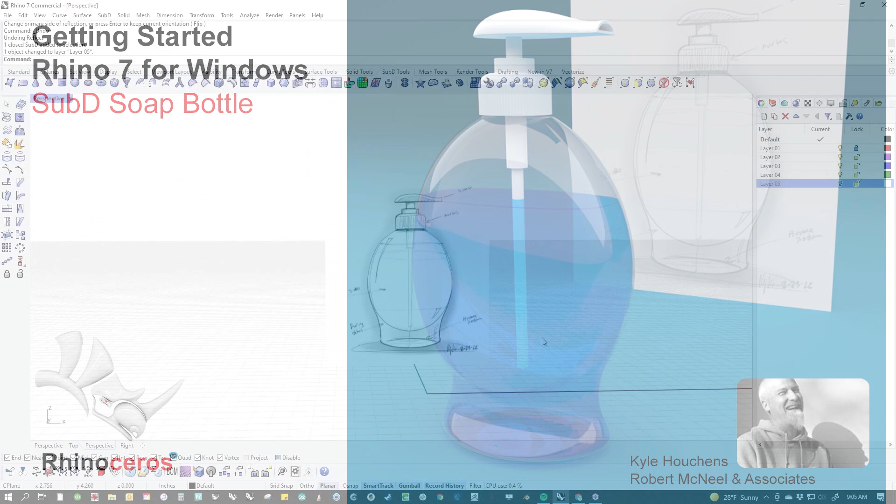This is Getting Started Rhino for Windows. And today I want to talk about a deceivingly simple object that we're going to throw a little wrinkle into. And the wrinkle of this project is this fairly innocuous, fairly simple looking shape, but it's got a fading detail on it down here. So it's got this little detail that starts down here and fades into the rest of

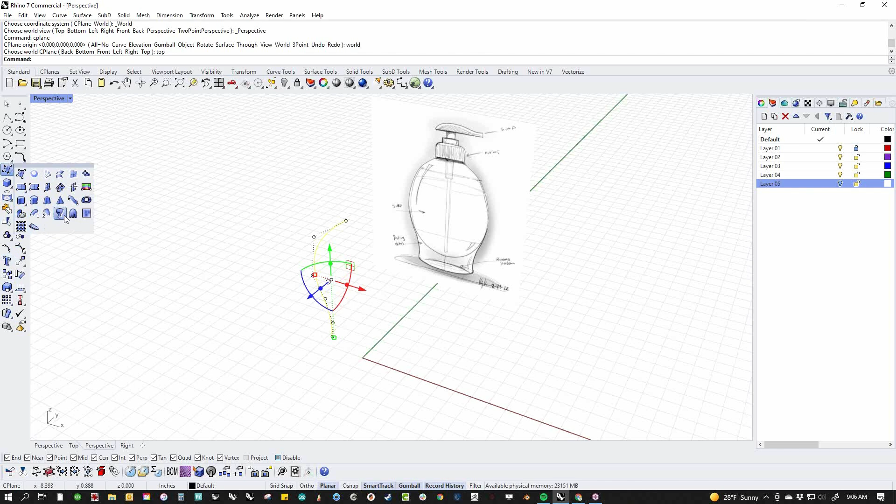this organic shape. And typically speaking, if we were going to do this with NURBS, we would just do a very simple, and in fact, this is actually one of the level 1 or level 2 projects where we would just take this shape, and I'm just going to do this super quick, and we would revolve it, which seems very simple, right? And we would full circle this, and then we'd squish it.

And then in order to get the detail on it, we would actually just take a plane and run it through here. And the way that we would do that is we just drag this and hold down shift and we get a plane. And that makes this detail, right? And if I cap this, and if I mirror this, oh well, mirror this.

My fingers aren't warmed up yet, sorry.

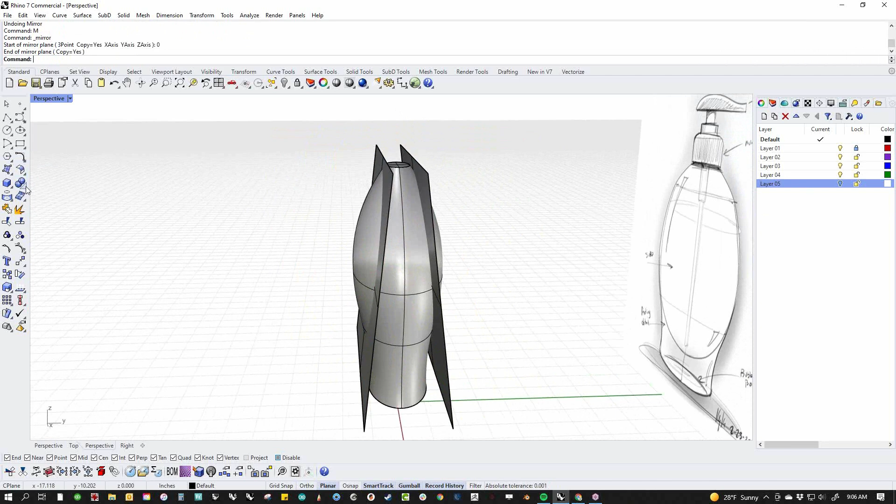There we go. And then if we just do a Boolean split, we get that, right? Now, that's all fine, but that's kind of not what we want. We want this shape to be kind of bulbous, and we want this all to be smooth, and we want this all to have a little detail on it.

And so the challenge here is you could try to figure out how to model your way around that in NURBS, and we could build a surface that's got some crown, and then we could build a transition in here, and we could have some kind of crazy blend that starts out really big and gets really tiny down here and all that kind of stuff. And that is a completely and 100% valid exercise, and that's a completely valid way to do it.

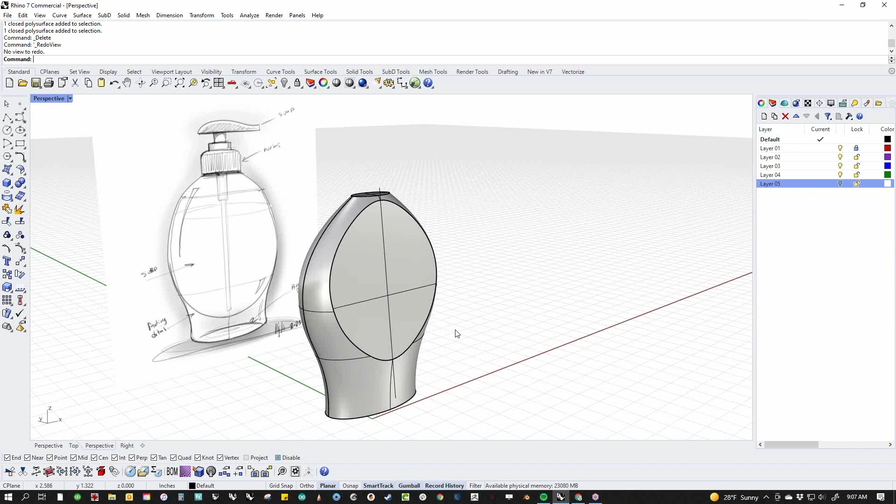However, because in version 7 we have SubD available to ourselves, just hit the chat and let me know how many folks have had a chance to play with SubD yet? If you haven't, you're going to now.

So what we're going to do is we're actually going to model this thing in a couple of different pieces, and we're going to use the best tool, SubD subdivision surfaces. Yes, it's this palette right up here, the SubD tools. So if you haven't had a chance to play with this yet, you're either going to love this or hate this, because this is where we're going for a little while.

And so I did this awful sketch earlier today just to get an idea down, to try and figure out what we were going to talk about today. And I was looking at a couple of different shapes, and I looked at this and I thought, well, this is kind of a standard level 2 NURBS exercise. And then I thought, well, actually, if we throw this detail in here, this turns it from a fairly simple project into a very complex modeling problem. And the nice thing about SubD is it takes those complex modeling problems and it makes them actually fairly simple.

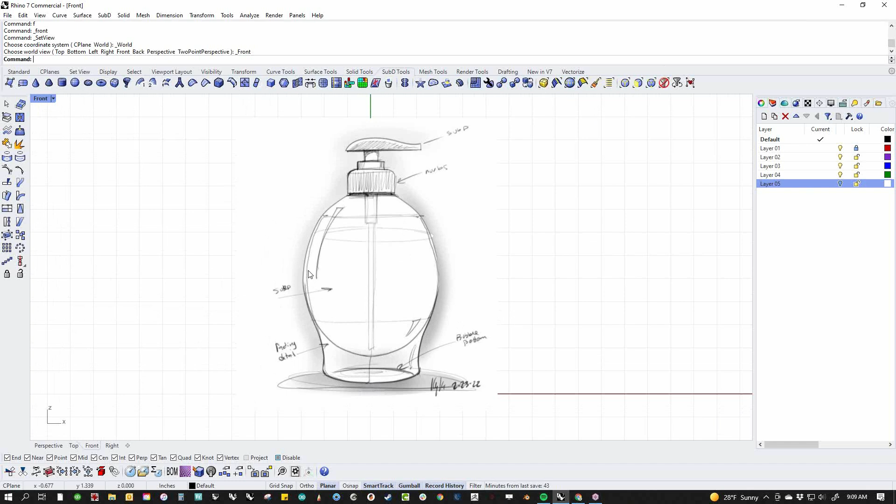And so I started this project the same way I always do, a 2-second sketch, which is one of the reasons I like Rhino, because I don't have to sketch quite as much as I used to. I can just throw something together, have a communication with myself, decide what it is I'm going to do, throw it into Rhino using the picture command.

And if you are not familiar with the picture command, let's go back and run that. We just do the picture command, find our drawing, and we drag it into the space. We can move it around, scale it, rotate it, do whatever we want.

And I'm going to go here to the materials palette. If you don't have the materials palette or the materials tab here, right click, find materials in this list and make sure that it's checked, and that will give you this materials palette. If you click on this, you'll see that this material's loaded up already, which is the soap bottle JPEG.

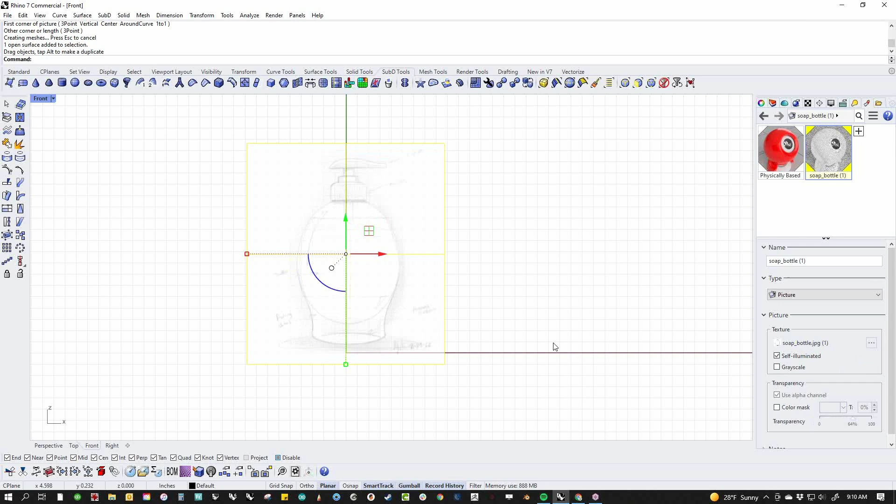And we're just going to crank the transparency up a little bit just so it fades and it's a little easier to work over. And then we're going to stick it on a layer. I'm going to change the layer here, go to perspective view, and I'm going to drag it out of the modeling window back here like this.

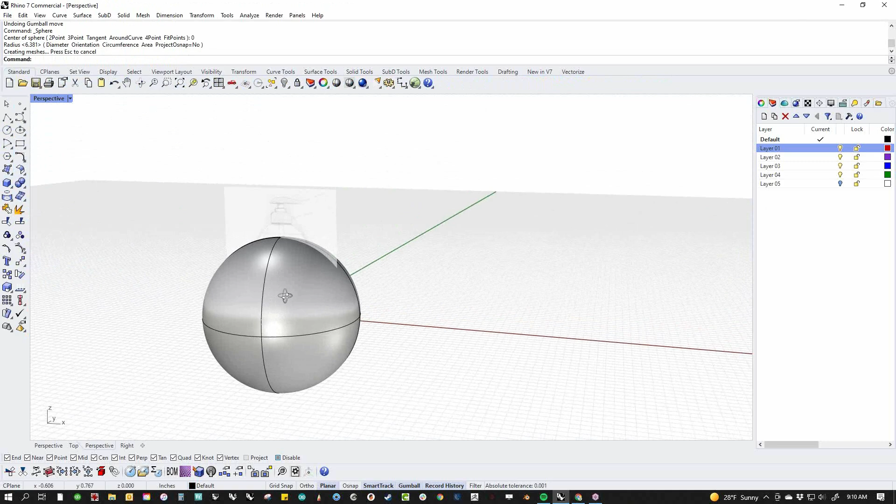And the reason that I do that is, everybody asks me, why do you do that? The reason I do that is because if you're modeling, especially in shaded view, this is what you get. So you can't see the image at all. So I take this and I just drag it back in space, which allows me to still see what I'm doing, but in the front view, the image is still placed where I want it. I'm going to drop this just on the origin just for the sake of it, have it vaguely centered and all that kind of stuff, and we'll use that to work on.

And then I'm going to lock this layer. Now I can work over it, and because it's faded, when I draw curves, I can see what they're doing and all that kind of stuff. So how do we approach any shape in SubD? And for me, the simplest, easiest way to approach SubD is to do what I call the paper doll workflow.

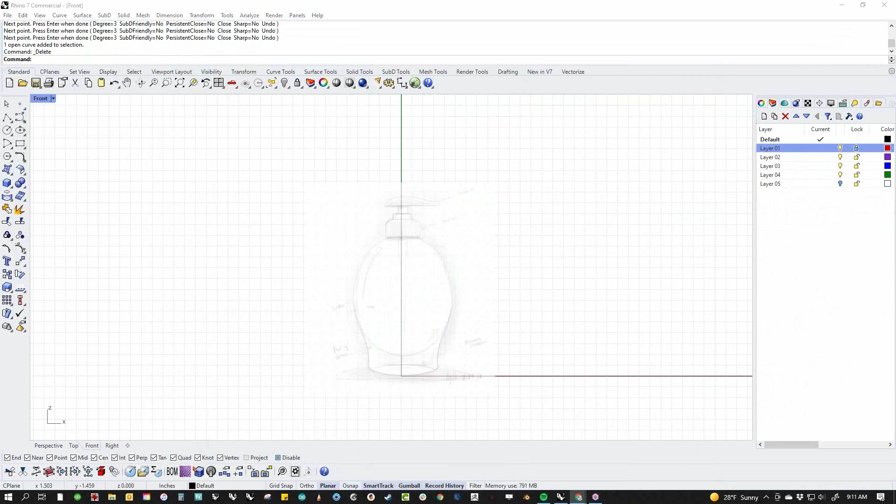But in this particular case, what we're going to do is look at this, and I'm going to grab my little marker thing here, and we're going to look at this and say, how does this break up? Now, the important thing to look at is this shape right here. This is what's going to drive the entire creation of this object, is this oval shape.

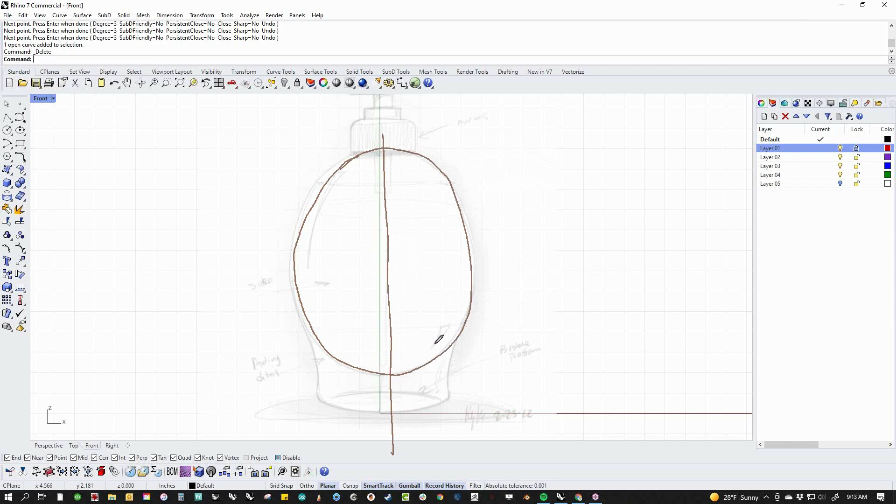And so we've obviously got a center line, and we need 3 points to make a corner, right? So we need at least 3 edges here. So we've got a point here, a point here, a point here, a point here. So we got 4. But that gives us enough stuff that we can go 1, 2, 3 here, 1, 2, 3 here, and we get our 2 separate shapes.

Looks good now? Okay, fantastic. Thank you for letting me know.

So this is essentially the first paper doll that we're going to create. And let me clear this. And so we will go ahead and start drawing. If we go to the SubD menu, we're going to just start drawing a square, right? We're just going to go 1, 2, 3, 4, and we're going to just hit enter to accept it.

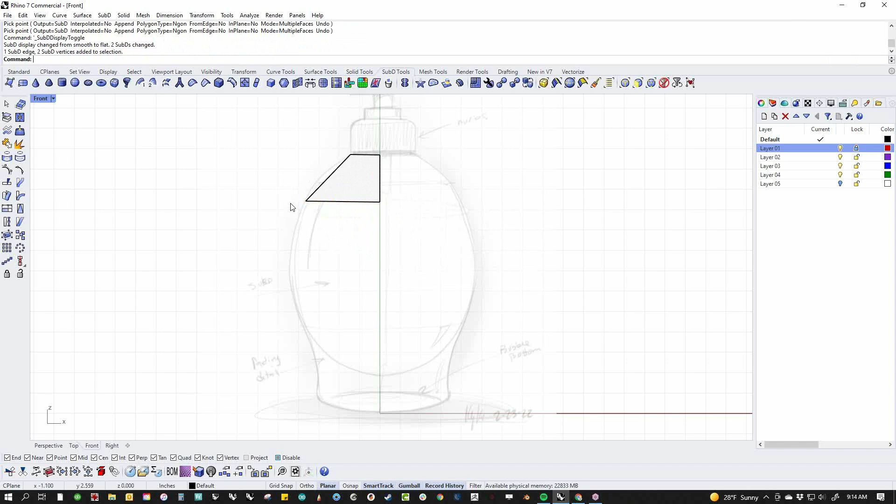And then I'm going to switch to box mode, which is under the tab key. So I'm going to hit the tab key, and that's going to give me my first square. Now, my second square, I'm just going to grab this edge. I'm going to shift control drag that edge, and it's going to light it up. And I'm just going to drag down to about here. I'm going to do the same thing again, and I'm going to drag down to here.

I'm going to shift control drag a point, and I'm just going to pull this, I don't know, somewhere in there. And I'm going to pull this somewhere in here. Now, this gives us kind of a stop sign shape, which we don't want. So I'm going to shift control drag this point. I'm going to shift control drag this point. I'm just going to delete them. Look what happens. Those turn into triangles. And that is going to allow us to do some things in here.

And I'm just going to line these points up. We'll try to keep everything kind of nice and orderly with SubD. And if I hit the tab key, you'll see I'm starting to get this nice round shape. Whereas if I had left those points, let's see, put it back where I found it.

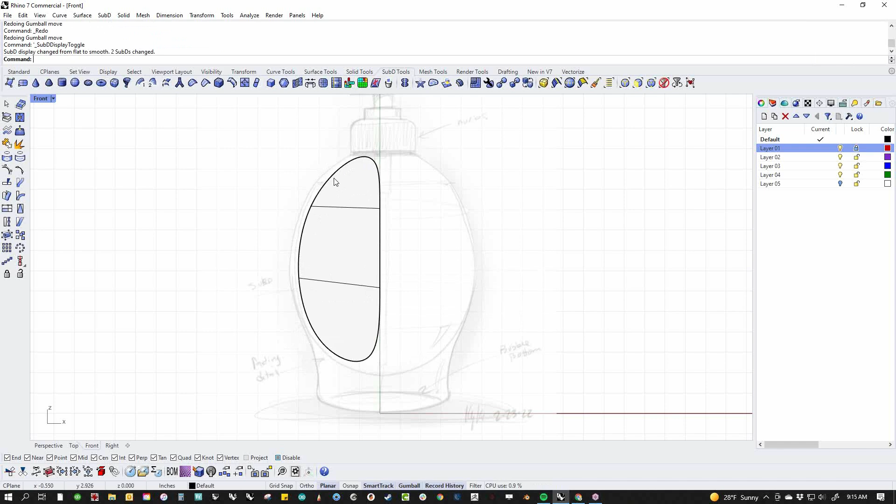If I'd left those points, I still get this kind of shape here, but there's two edges, and I don't necessarily want two edges. If I turn my points on, you can see them. There's an edge here and an edge here, right? 1, 2, right there. So I don't necessarily want that, but I might be skipping ahead a little bit. So let me hold off on that for just a second, even though I already showed you that.

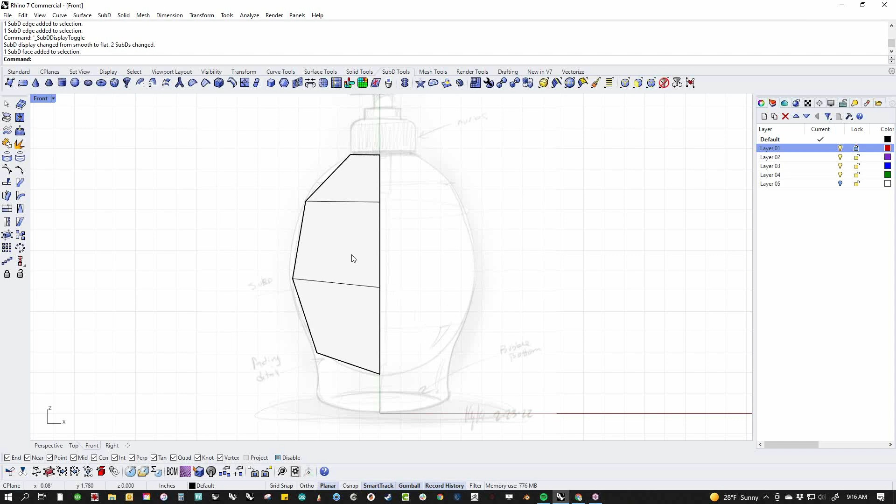Let's grab this entire object and let's just mirror it. And I'm going to just mirror it over here, and then I'm going to join. Because this center line is coincident, because all of these points line up, the join command will actually join a SubD, and there's a smooth option here, which is what I wanted. And you'll see now that we have our first paper doll, right?

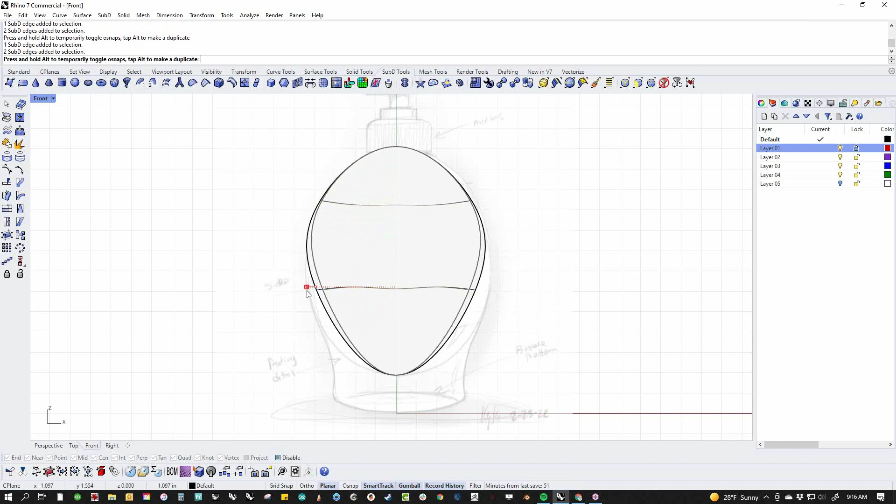And we can experiment and see, does getting rid of these edges help or hurt? Or points, I should say. We should get rid of these points. And does it help or hurt? And in this case, I think it initially looks like it hurt us, right? But if I drag this back out to the shape that I was looking at, I think that I'm going to just scale this whole edge out. I think the shape is a little bit more conducive to what we were hoping for, right? And so I think I'm going to say that was the right choice.

And that gives us this kind of Teenage Mutant Ninja Turtles shell here. And now we can start playing with adding some shape to it, right? I could just pull a little bit of shape in here like this. And because we kept this really simple, this is very easy to modify, and it's very clean and very nice to work with, right? So I'm going to pull this a little bit off the center line here, assuming that the center line is obviously going to be the center line of our object.

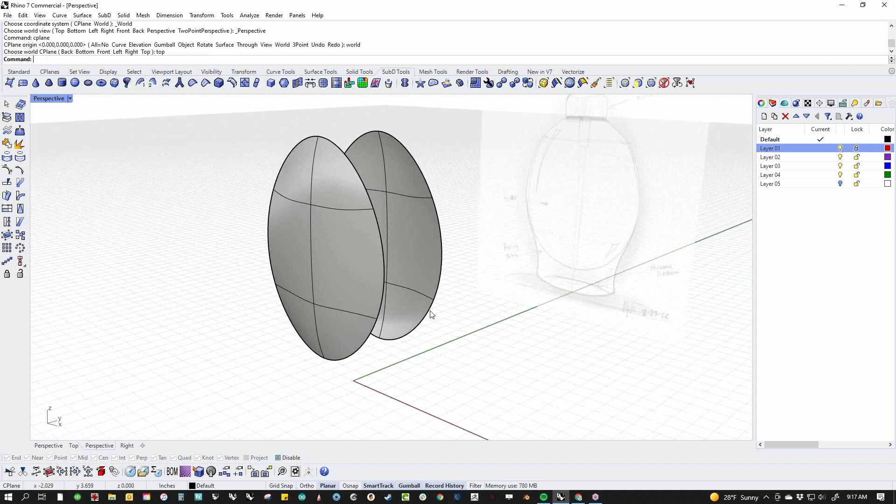And then I'm going to mirror it. I'm going to bring it back here like this. And now I've got my front and my back, and this thing is starting to come together pretty quick. If I pick these two edges and then double click in between, pick these two edges, double click in between, I get partial edge selection, which is what I want, because I'm going to bridge those edges using the bridge command. And I'm going to add two segments because I do actually want a center line through here. And I may pull that out later, but for now, I want a center line because that gives me my third point. 1, 2, 3.

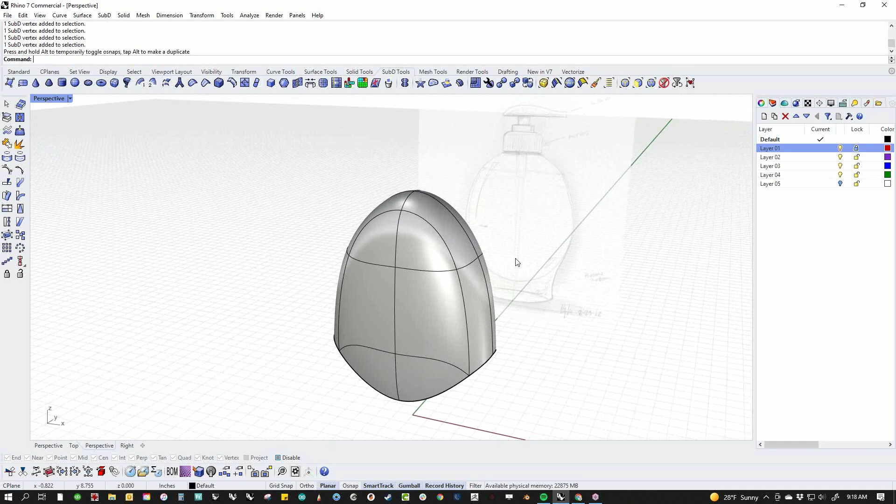There's another video that I'd like you to look up called Rule of 3, and that is also on our YouTube page, and that talks about how to make a corner bend in SubD, and you need 3 points to make a corner just like you do with a NURBS curve, right? And I'll just digress for a second and cover that. If we make a NURBS curve, we've got an anchor point, and then we've got 1, 2, 3, and then we've got an anchor point. So the corners are all made up of 3 points, right? 1, 2, 3, right there.

And if we modify those 3 points and put them closer together, we're going to get a sharper corner. You're going to see this later. If we move these farther apart, you get a softer corner. And so in order to bend something in SubD, or NURBS for that matter, you need at least 3 points to make that corner. And in SubD, we try to keep that in the back of our mind.

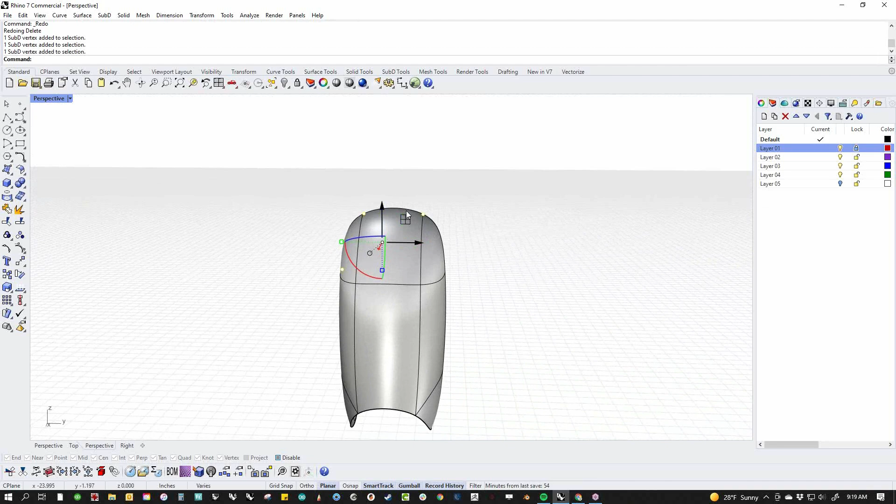Because if I were to get rid of this, you'll see that this becomes much softer than it was before, right? See, that's a little sharp, and that's a little softer. And the reason for that is now our 3 points, 1, 2, 3, make up this curve right here. And this curve back here is made up of 1, 2, 3 right there.

So these points kind of steal from each other and make this big soft shape. If I put this guy back, now my curve is 1, 2, 3, right? Oops, missed that one. 1, 2, 3. So this shape and this shape now can function independently because we have this center point, right? So I can modify this to do whatever I want.

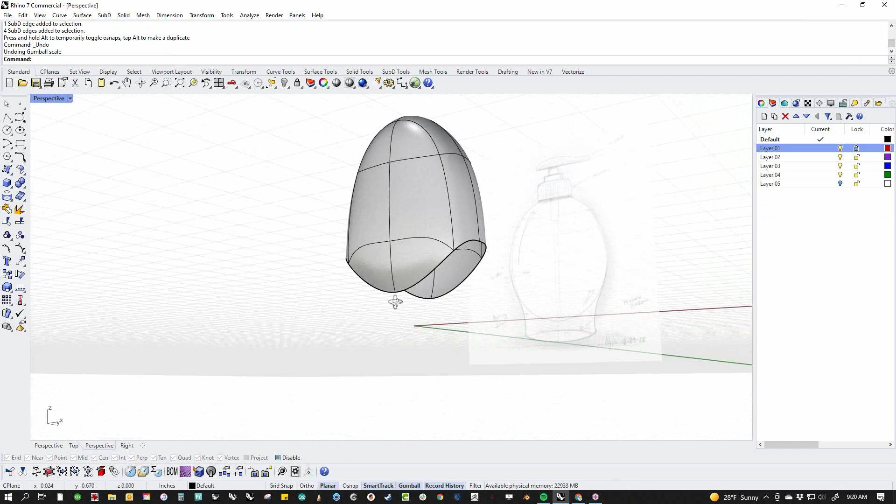So for now, I'm going to leave it because I want to have the opportunity to be able to do things like soften the center line of this thing or sharpen the center line of this thing or do whatever. And for now, I think that's what I want. But I'll find out in a little bit whether or not that's actually what I want, and we'll see. So now we're going to take this piece, right?

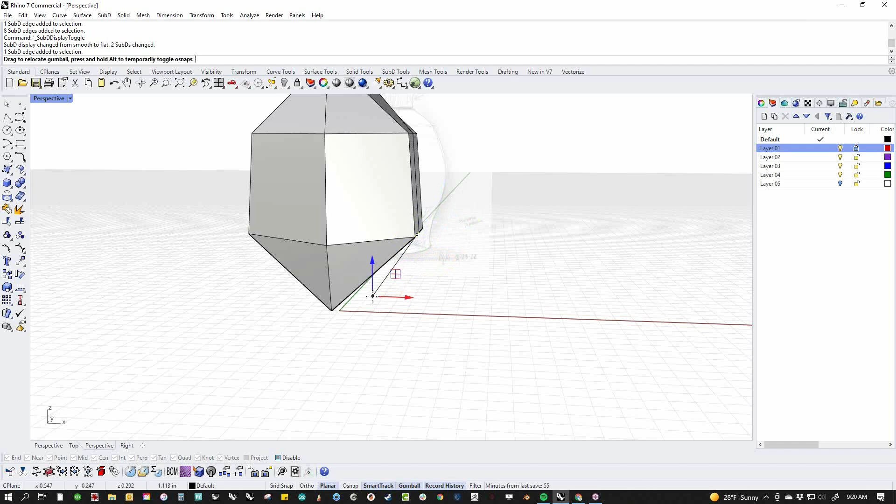Let's go to box mode so that we can see what we're doing. And I'm going to extrude this face, and I'm going to use the C-plane waffle here, and I'm going to hold down the control key, and I'm just going to pull a face. Oops. I'm going to pull a face out of here. So I'm going to start dragging it, and I'm going to hold down control, and then that's going to drag a face out here. And I'm going to just place it somewhere in that vicinity.

And I'm going to do the same thing over here. Shift Control click. I'm going to start dragging this C-plane waffle, and then I'm going to hold down control, and it's going to give me a face. Whoops. Let's do it again. Get in a view where I can see it. Start dragging, hold down control, drags out a face. And so that's going to give me essentially this loop that I'm looking for.

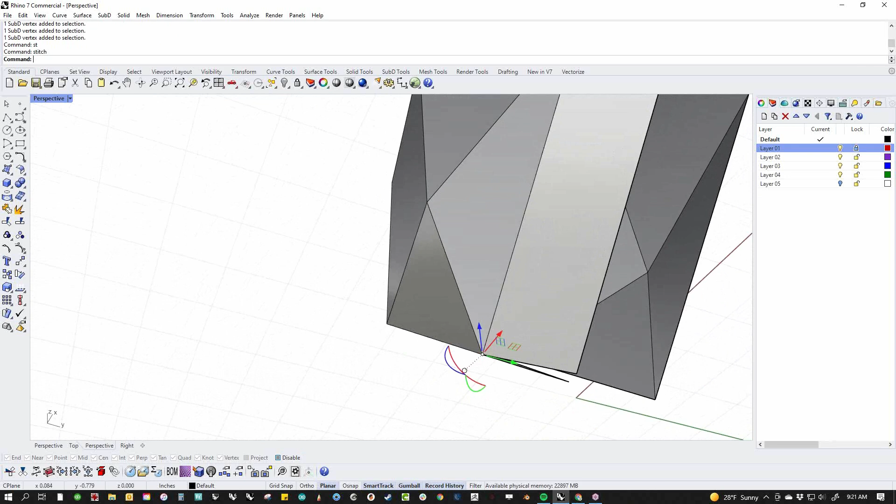And let's grab all three of these points and let's stitch them. I'm going to stitch those like that. And now I'm going to open this a little bit, and I'm going to pull this guy kind of out like that, and I'm going to pull this guy out like that. And then what I might do is stitch these two guys together, and I want them to be vaguely in the center. And then I'm going to move this down and create a ring like that, right?

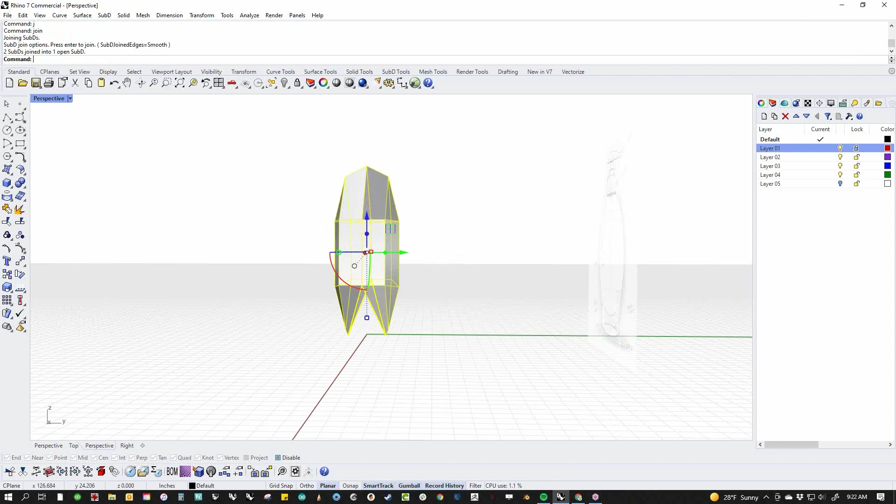And once I have this ring, I may actually just delete that, mirror again, and join again. That way I don't have to do the work twice. So we've got our basic layout here, right? And you can see that our flow is nice, our shapes are nice, and all I need to do is finish out the bottom of this.

So I'm going to double click this edge, which is going to give me this loop, and I'm just going to extrude, and I'm going to extrude. And then I'm going to click this and scale to 0, and that's going to flatten out my bottom. And you can see that we've got a really nice base for what we wanted to make, right? Let's go to the front view, and we can go to wireframe, and we can adjust it a little bit. And we actually are pretty darn close. I'm pretty happy with that.

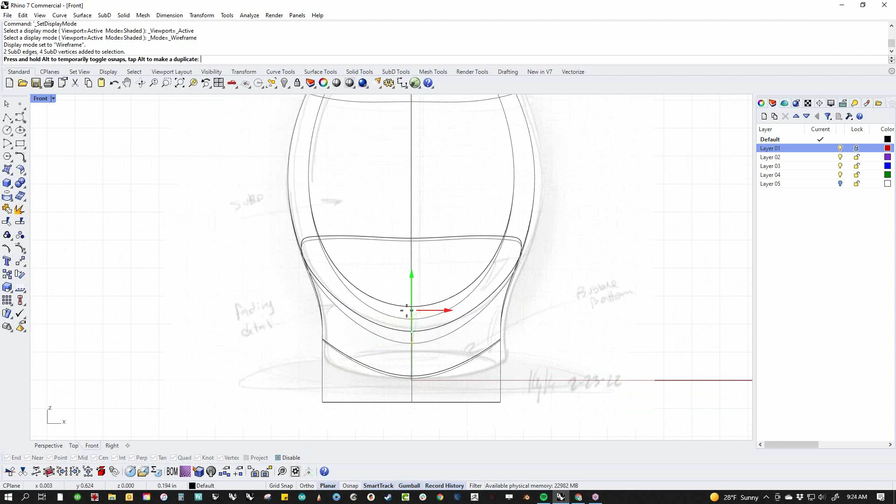So let's slide this up a little bit. I'm going to just place this edge kind of right there, and then let's flatten out this one a little bit like that and slide it up, and then let's move the base up. And there's a little bit of parallax on this drawing, so I'm going to call that the bottom, and we're going to assume that that's flat as opposed to the drawing, which is badly drawn.

All right, so let's take a look at our overall shape and see what we need to adjust. So from the right-hand view, this thing is a little not very balanced, right? So let's just scale the base out a little bit like this, and we're going to scale this base out a little bit, and we're going to grab these two edges, scale those guys out a little bit. We're going to get a little bit nicer shape out of that.

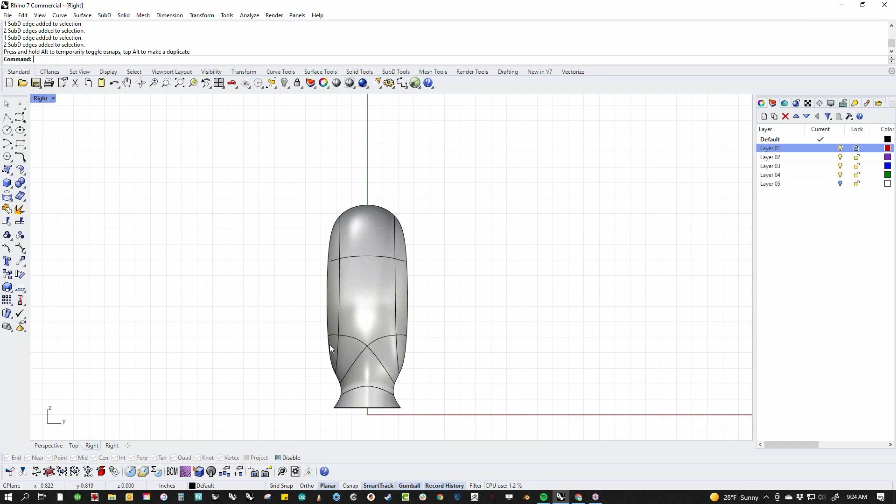And then we're going to do the same thing up here. I'm going to just scale all of this together. And then maybe I'll go back and bring this back out so that it's got a little bit softer form to that. But it gives us this kind of a little bit nicer shape.

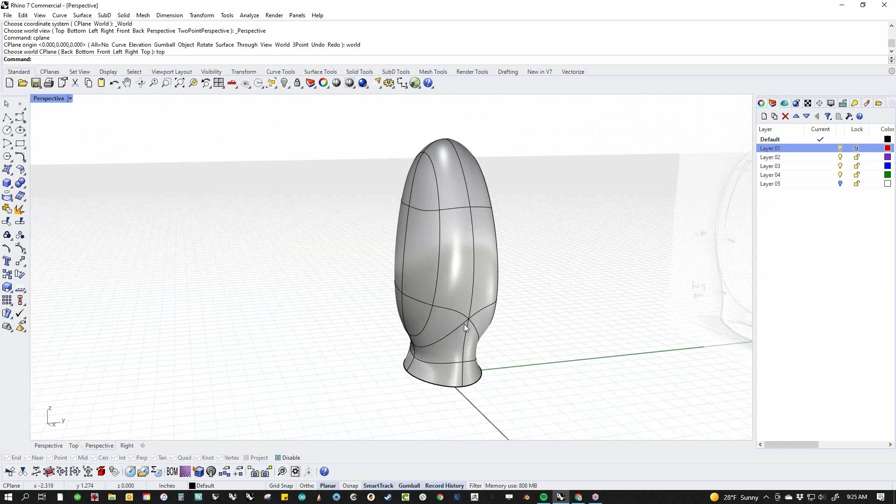But you can see that we've got this nice highlight that comes in and comes out and fades away, right? It goes away up here and it comes back down here, which is nice. And if we look at this in a rendered view, and if I throw a material on here, we can see that we are doing what we wanted.

Now, the only thing that we have to decide is how much detail and how much sharpness do we want out of this line. And we can always add more by inserting an edge, right? Somewhere, let's put it somewhere in here, and then we'll mess around with it a little bit, get it a little bit cleaner where we want it to, right? So we can sharpen this up if we want. See how that detail starts to sharpen up? And we can fade it out by getting rid of edges up here.

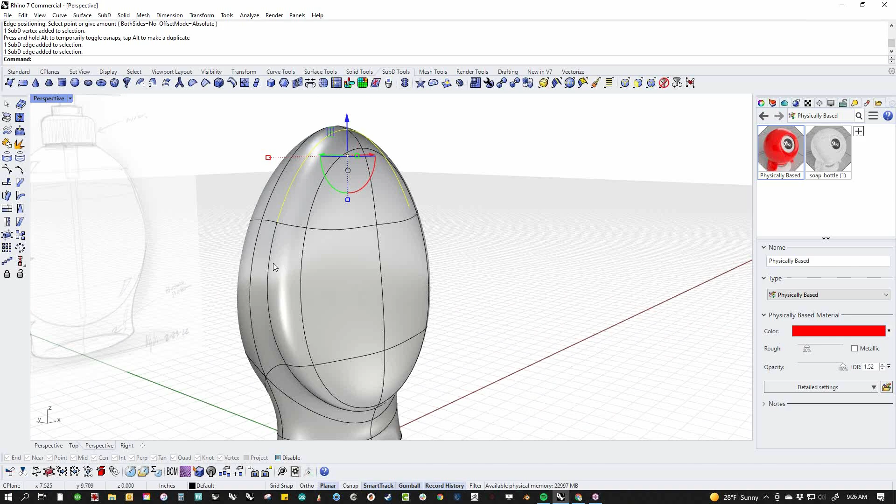And this is one of my favorite things about SubD: it's super durable. I can just add stuff and take stuff away and experiment and see what it is that's going on here. And maybe I want to play with the topology a little bit and I want to stitch those two edges together and create something really sharp. No, maybe that's not going to work. Let's see.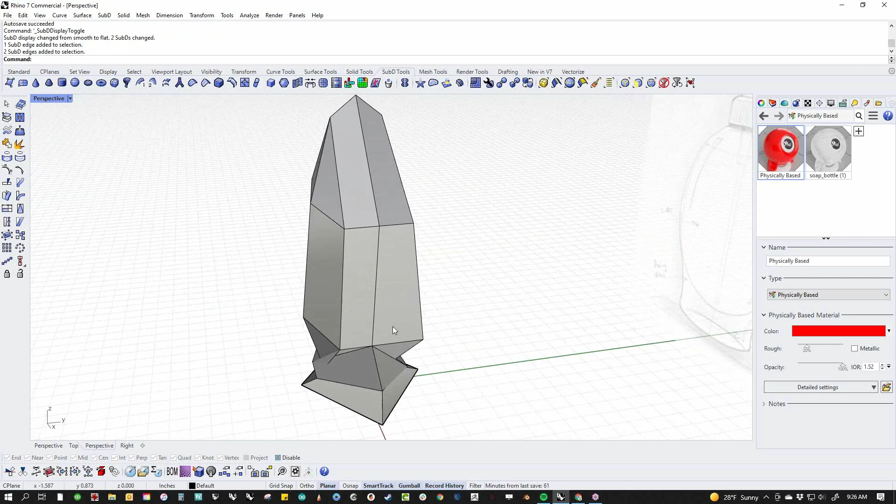I don't love that. Maybe this edge needs to go away. That's a little better. So it's got a little sharper chin on there, right? But it still fades out nicely. And I'm not worrying about the backside because I can simply just come back here and delete this. And let's fix a little bit of our box mode here. Let's grab this and this and this, and let's flatten that out.

And the way that I'm going to do that is I'm going to come down here and relocate the gumball right to the center, and then I'm just going to scale it to 0. That straightens out the whole center line, and then we've got a little bit of a mess here that I don't like. So let's fix that. Let's take this edge. I try not to build stuff that's got crazy crossing verts. So we're going to straighten those out a little bit so that they're not all whacked out.

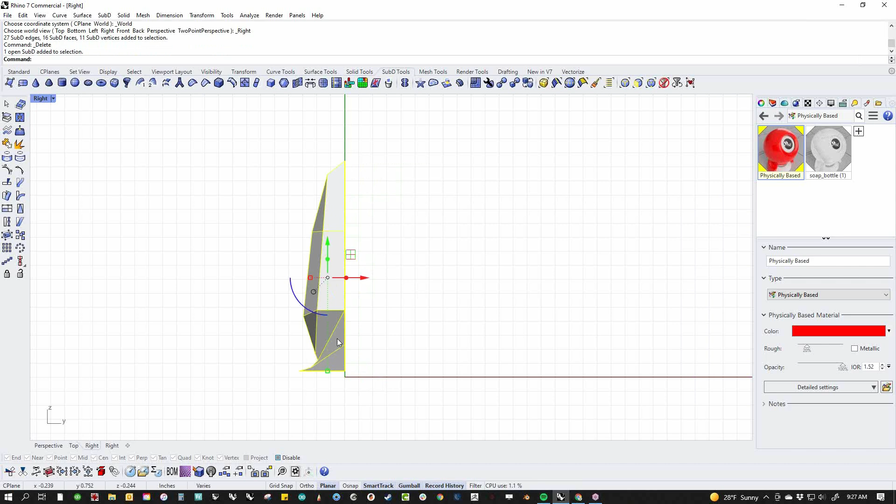And then let's see what that did. And that seems to have cleaned it up just a little bit. But we've got our nice fading detail back. And we messed up one side and we didn't do the other. So let's just shift control drag. We're going to get rid of all of this again. We're just going to mirror. There is a reflect command. I find it a little bit invasive sometimes, and so a lot of times what I'll do is just what I just showed, which is to jump back and forth between the two.

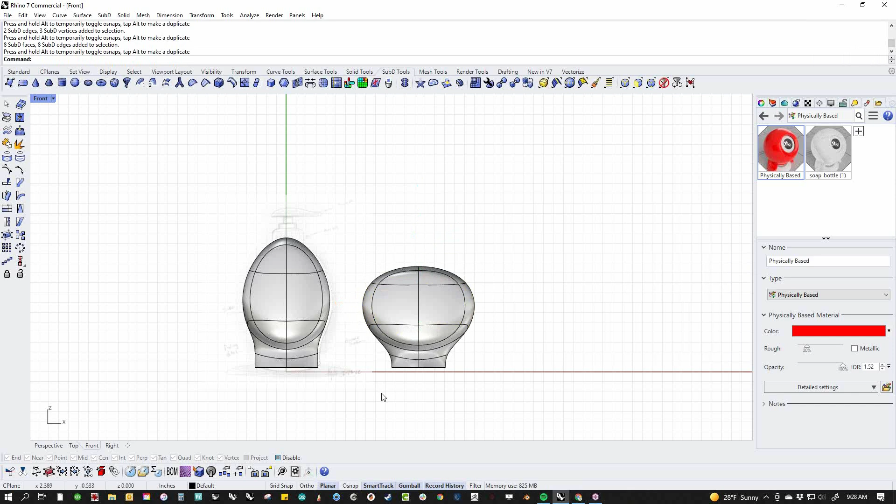All right, so we've got our basic shape, and the cool thing about this is because we've built this way, we can now iterate with this in SubD, which is super, super useful because we can take this and we can squish it, we can stretch it, we can do all sorts of things and get all sorts of different shapes. This can be flatter across the top, this can be wider through the middle, we can drastically change very, very quickly and create all sorts of different shapes from this initial design.

And so a lot of times what I'll do when I'm working on a SubD project, I'll actually take this and I'll send this to a clip art file where I'll actually keep this as a quote bottle base. And then the next time I have to do a bottle that has a shape like this, I'll bring in this piece to start with, and it saves me the trouble of having to go and redo this work from scratch because it's already done.

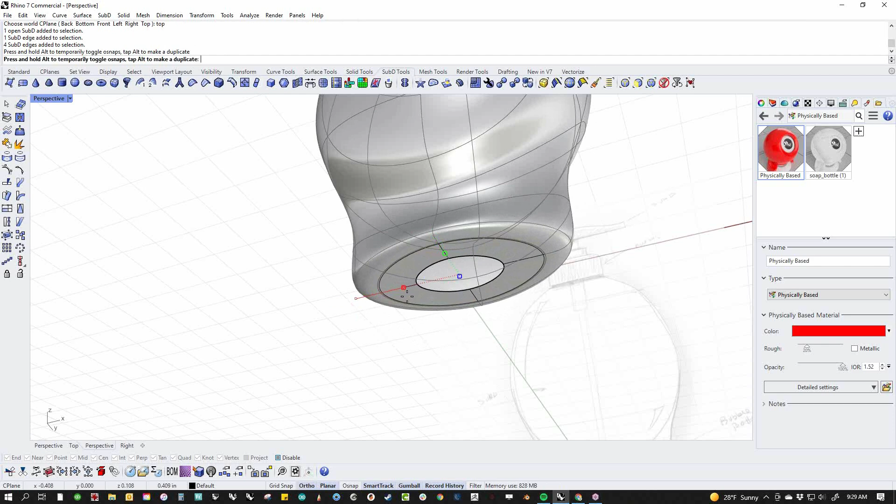Let's finish up the bottom of this, and what I'm going to do is I'm going to hold down a scale handle and I'm going to start dragging. Then I'm going to hold down Shift, which is going to scale it uniformly. Then I'm going to hold down Control, and that actually is going to start extruding out new faces. So click, drag, hold Shift, hold Control, and now we get another face that's added down here, right? So we added this ring and we added this ring. And all without going to the toolbar.

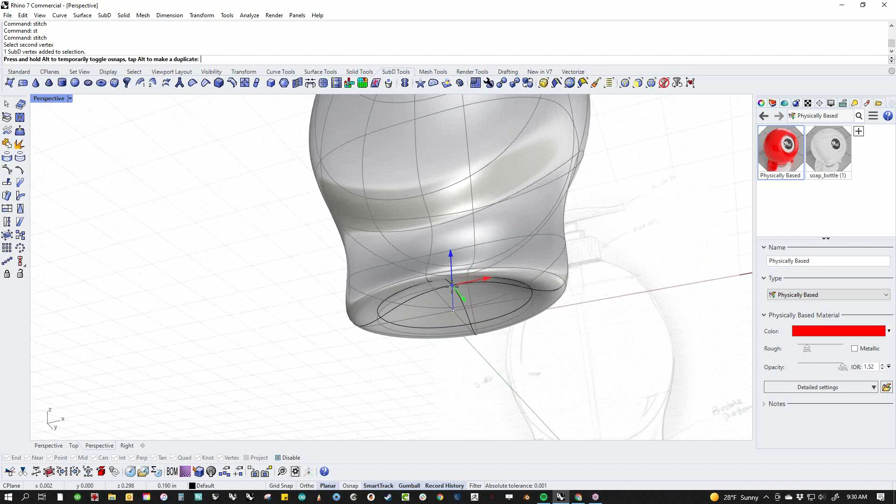This is all off of the gumball. And so now what I can do is I can take these 4 points, Shift, Control, click, I can hit Stitch, and that's going to close them all up into the center, which gives me the opportunity to put my bubble bottom in there just by pushing that up, right? So now we've got that really great shape, and we can mess with the base of this.

Say we print this and decide that it's too top heavy. All we have to do is just drag some more base in there, right? So it's super easy to modify, which is one of the things I like about SubD over NURBS, because if we had done this in NURBS with curves and surfaces and fillets and blends and all that kind of stuff, we'd have to get into like cage editing or all sorts of stuff like that in order to be able to mess with this thing if we had found out there's a problem down the road.

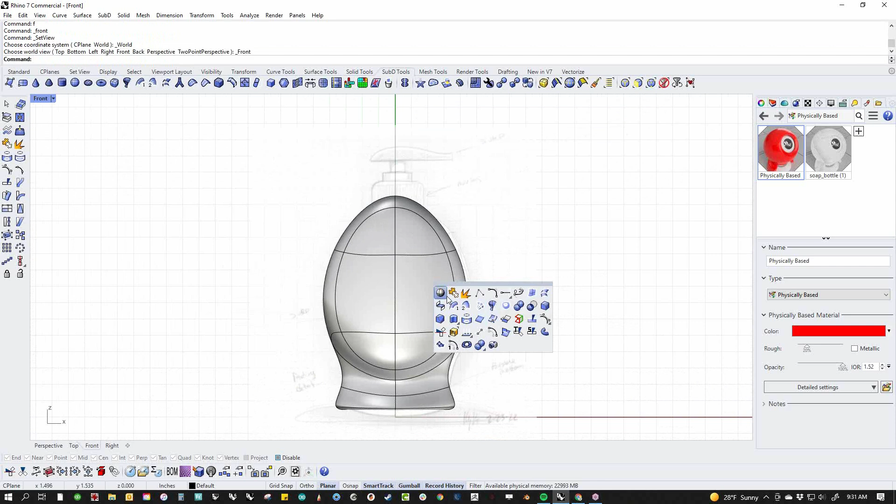Where with SubD, it's just as simple as going, well, we need more base on this thing, or we need less base on this thing. And that's super, super useful, right? So we've got the basis of our shape now, and I'm pretty happy with the way that this is looking. So we can start looking at the rest of the model.

And there's a couple of elements in here that I think are perfectly suited for NURBS. I wouldn't do this part, and I wouldn't do this part, and I wouldn't do this part up here with SubD. I would do that with NURBS. And so let's just go ahead and throw that together. So we'll just go back to our standard toolbar. We'll come up here, and we're just going to draw this shape. And I'm going to leave the fillet out for now. And I'll go back and throw the fillet in.

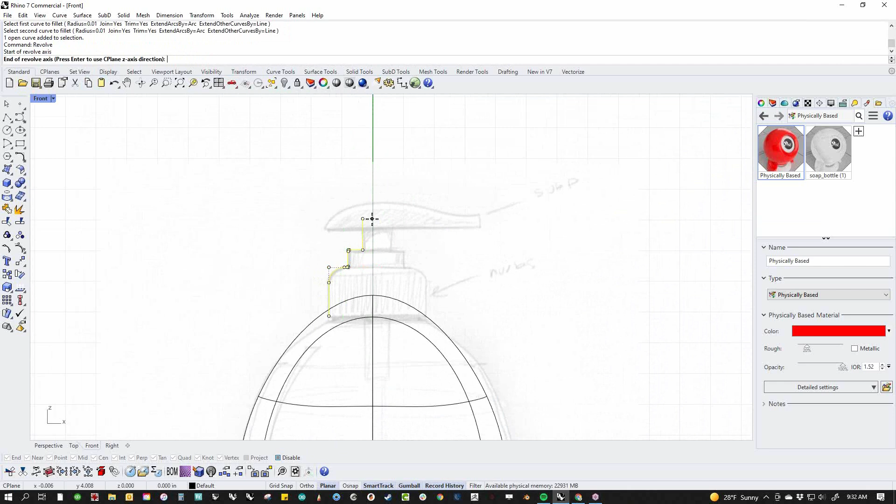And I'm going to put a teeny tiny little fillet in here just so that these are round there. And I'm going to round this one as well. And let's go ahead and just revolve this. I'm just going to revolve this around 0. Let's see, let's revolve it here. And we want it to be full. So I'm just going to hit F, enter.

One thing for folks who are just getting started with Rhino, when you look at the command line, you'll notice that one letter in the command line of each word is underlined. That's the hotkey for it. So if I want a full circle, I just hit F, enter, and that is going to complete the operation without having to have any other input. So that's a nice little tip.

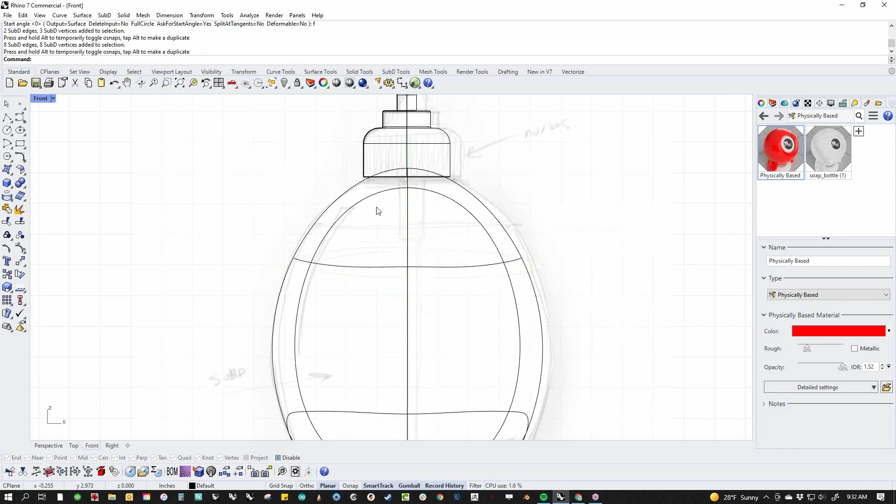I'm going to move the top of this down just a little bit because we're missing our shape by a little bit. So I'm going to move this down to here, and I'm going off the left side of this. The right side is a little wonky, so I'm going to go off the left side of this, and that gives us basically where our bottle and our top are gonna intersect.

And let's go ahead and draw the internal parts down here. So I'm going to just draw these in real quick. And this is something like this. And we're going to revolve this as well. And I'm just going to go off the center of this. Hit F, enter for a full circle complete. And that gives us our bits, right? And I'm going to hide this for now.

And let's just go and do a little housework here. So I'm going to cap this, turn it into a solid object. I'm going to cap this, turn that into a solid object, and as long as they're both lined up, which they should be but aren't, let's fix that. I'm going to just snap that up here. Gumball, snappy dragging, if you want to make sure that it respects your OSnaps. And I'm noticing, see my isoparams are all screwy? I did something wrong on this, so let's fix it.

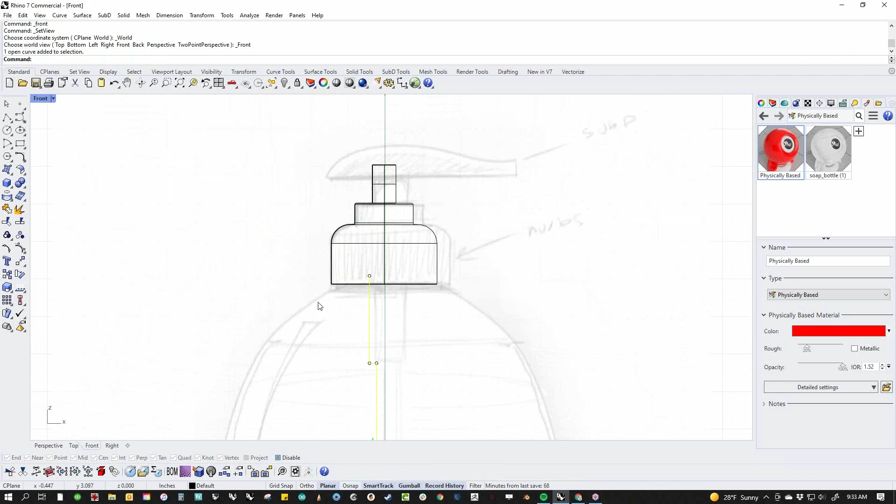Let's go and revolve this around 0 because I did it wrong the first time. There we go. That's better. See how the isoparams are radial? We don't want them twisting like that. That was an indication that something was not good.

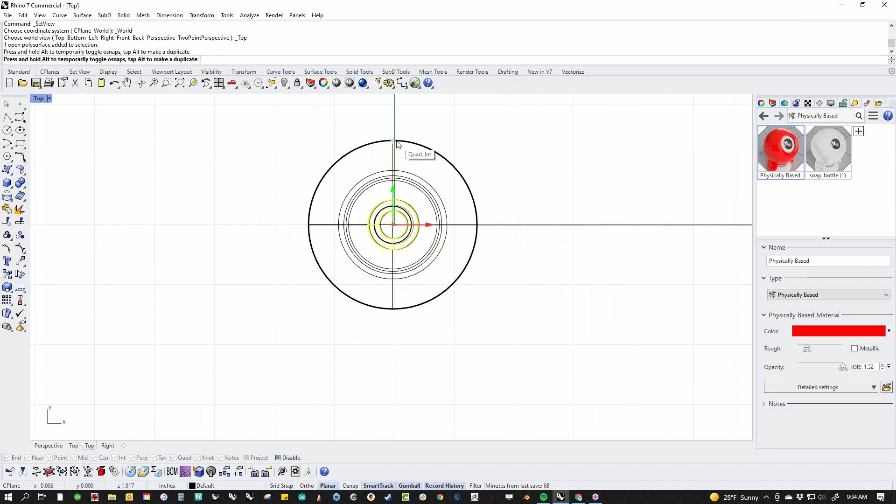And it looks like I'm a little off on my center line, so I'm gonna just line this up with that quad so that they line up. Everything should be concentric and lined up. Looks like the whole thing is slightly off center from the origin, so I'm going to just bring it over here and fix it.

All right. So high precision operation we've got going on here. All right, let's Boolean these together. And the Boolean did something weird, right? Why did that piece disappear and this one didn't? That's because something about this is either open or backwards, or one of these is backwards. So we have to then take a look at the normals.

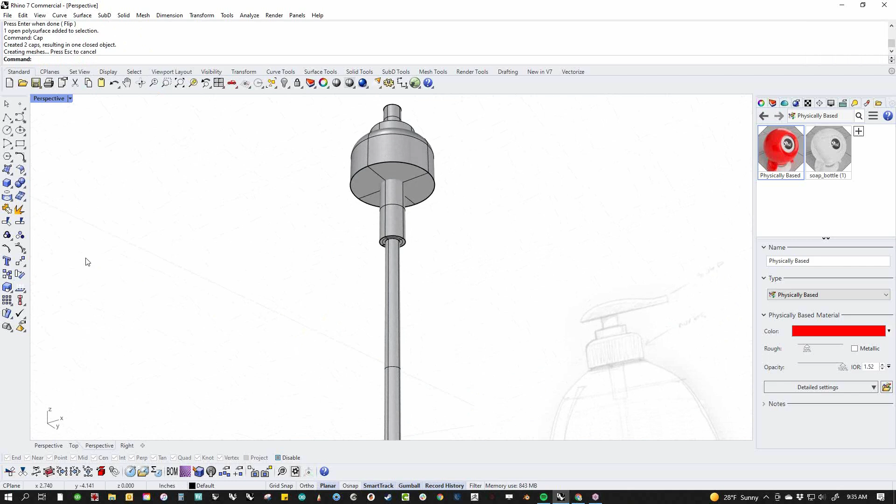And in this case, you can see that the problem is this one, the normals are facing in. So if I were to flip this and then cap it, which I forgot to do, which is why it failed. Now the normals are facing out on that one. The normals are facing out on this one. Now the Boolean should work just fine. All right, so if your Booleans do something different that you're not expecting, check the normals. Chances are one of them is backwards and you just need to flip it.

All right, so let's look and see how this relates to our bottle. Now, I need to make a slight tiny little transition between here and there. And this is where I have to think about my down the road a little bit and think about what I want to do. I've got my bottle shape defined and I'm happy with it, but I want to be able to maintain the ability to modify this later if I need to.

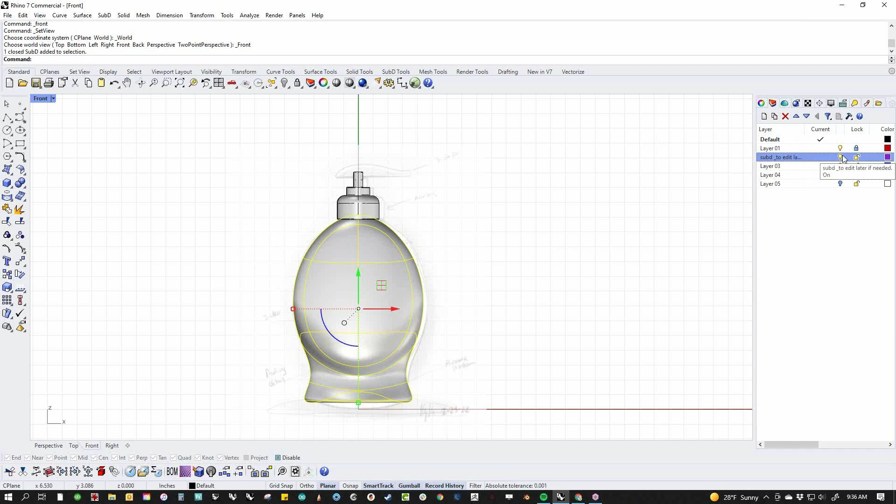So I'm going to pick this SubD object, I'm going to move to a layer, and I'm going to say copy object to layer, and I'm going to call this SubD to edit later if needed. All right. I never make my layer names that long, but you get the point. And then I'm going to just hide it. And that way I've got this piece banked.

If I move this out here and I turn the layer on, I've got this piece banked that if down the line the client makes a change, and I've converted this to NURBS, which we're going to do next, and I need to radically change the shape of the SubD, I've got the SubD still in the file. Okay, this is an important thing to kind of get used to doing.

So now I'm going to actually take this, and I'm going to switch it to NURBS because we're going to make some more precision detailing with this thing. I'm going to say to NURBS, I'm going to let it run, and you're going to see that this now is a NURBS object. This is a closed polysurface. It's got a ton of isoparams in it.

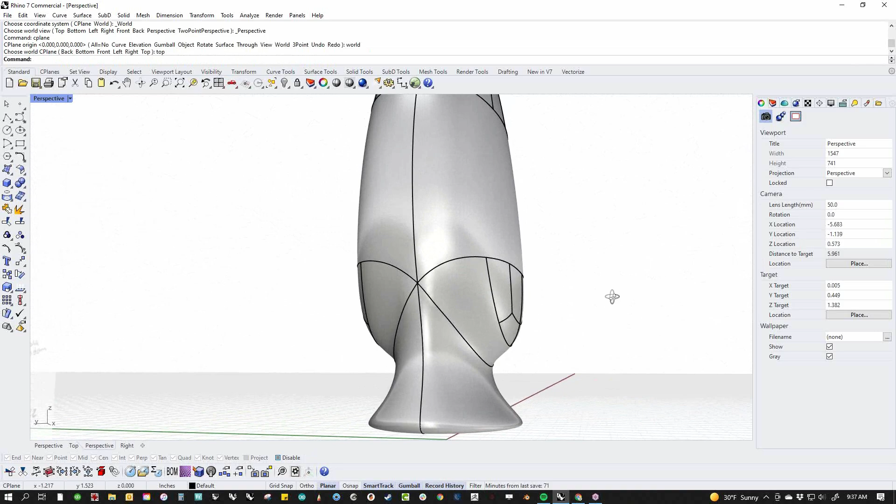You can turn those off simply by coming here and say shut off the surface isocurve, which gets rid of a little bit of the surface detail. But you can see that it's a one-to-one translation, and anything that you had done on the SubD is going to come up exactly like it was in NURBS and SubD. So it's a one-to-one translation.

So let's knock the top of this off, and we're going to just do that with wire cut. So I'm going to come back here, and I'm going to just cut this from here to here. I'm going to wire cut this, and I'm just going to go straight through the C-plane normal, and it's going to cut the top off. And the nice thing about wire cut is it cuts the top off, but it also caps it. So that gives us an opportunity to be able to work from this.

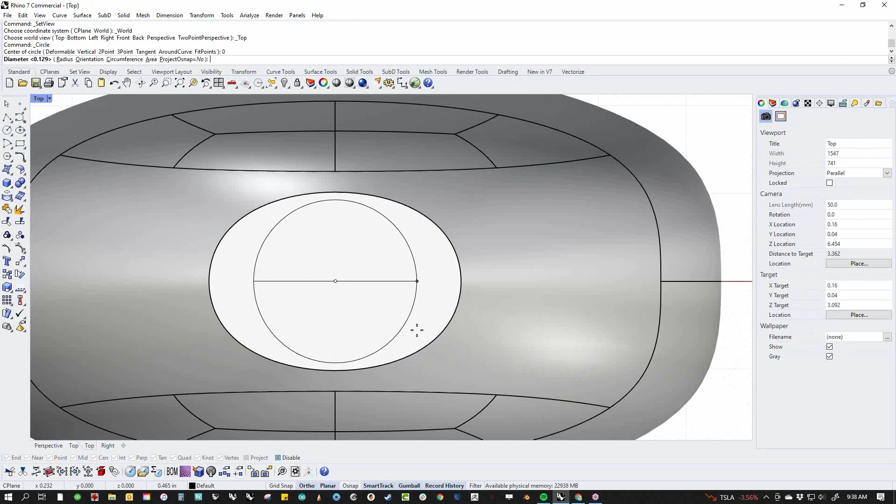And if I then want to connect this to the top, I'm going to just draw a circle and then grab that circle and extrude it. And that's going to be essentially the neck that this thing screws onto. So I'm going to cap this.

And what I can do is I can either just simply Boolean this together, right? And create that, or we can do something a little bit more interesting, which I think we're going to do, which is I'm going to shift control click and delete that face, and you're like, you just made it, why are you getting rid of it? And then I'm going to come up here and then I'm going to trim this off.

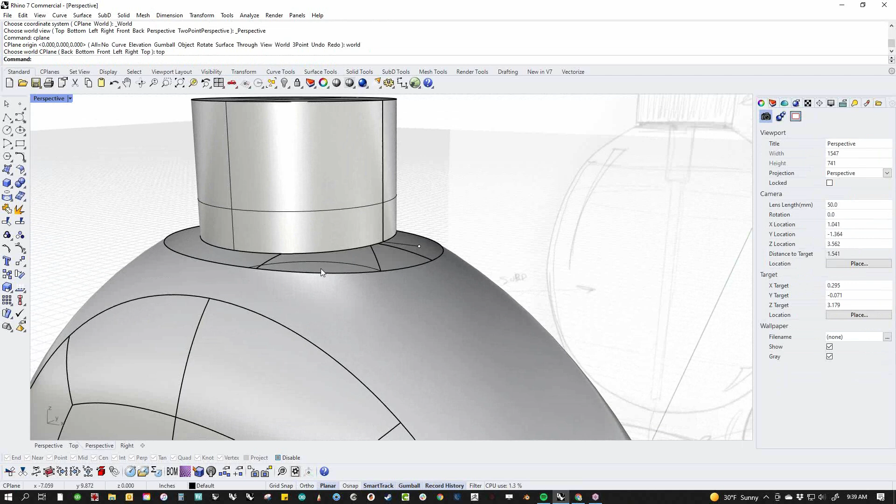And what that does is I've built a gap, and sometimes you model surfaces, sometimes you model gaps, and in this case I'm modeling the gap because I'm going to fill the gap with the blend surf tool. And I'm just going to roll this right around in here, and I'm going to set this to tangency, and I'm going to back this off a little bit just so it's not inverting, and then say okay.

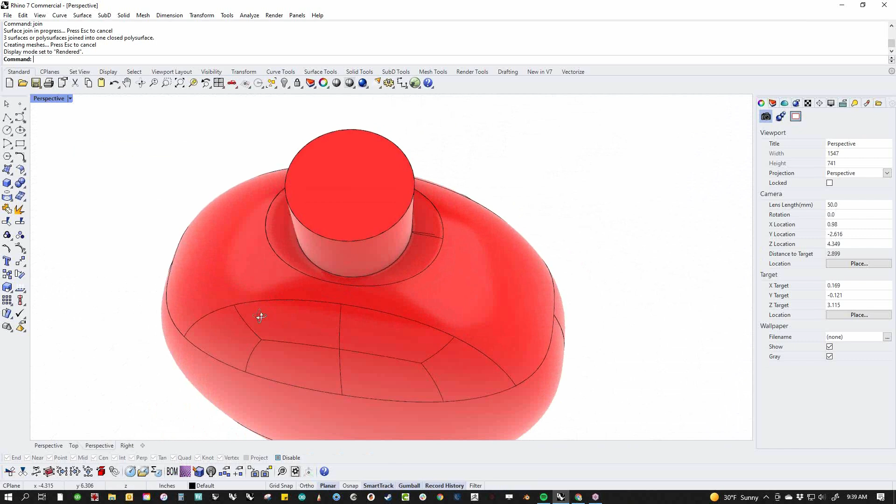Join it up, and that gives me a much nicer transition. Let me shut the edges off here. Gives me a much nicer transition than it would had I just clipped it, Booleaned it, and filleted it, right? So now I can bring my detailing back, and this guy looks a little big for our bottle, so let's go to the front view and let's scale this just a hair, because I think my sketch was a little big. Maybe that's a little small.

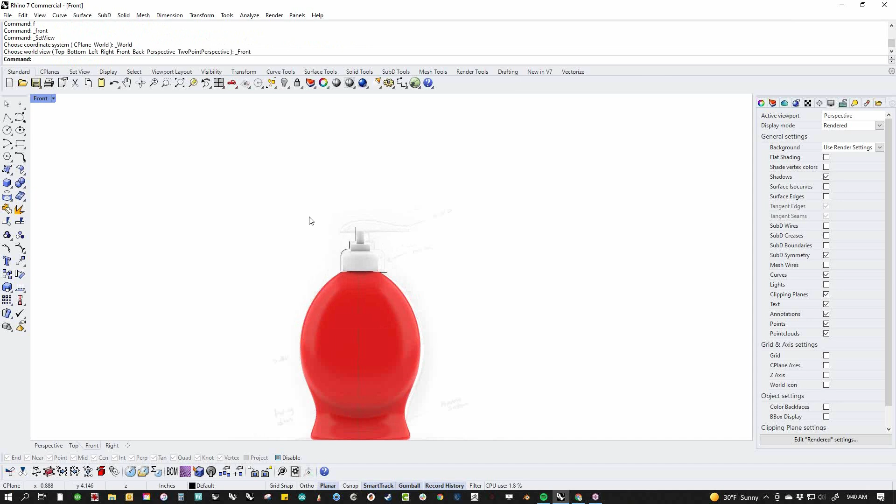This is why we design in 3D, not 2D, right? You can actually make decisions based on what you're seeing for real things instead of sketches where you can lie, cheat, and steal. All right, so that gives us our top. And the last thing that we need to work on is this element up here.

And I think this is a perfect SubD project, right? We could do this in SubD. We could also do this in NURBS, I guess, if you're looking at it. This could be a revolved object that we cut in half. So that's actually possibly a way to do it as well. Actually, let's do it that way. I think that actually is probably a better way. So let's go and just draw a curve out like this,

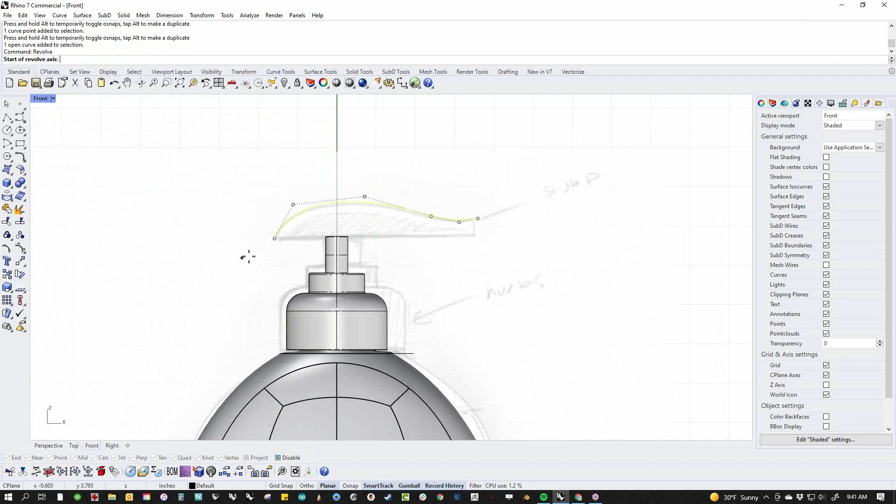and let's fix the curve because our curve is terrible. And we don't want to have too many points. We want just enough points. Pull it in, something like that. And I'm going to overbuild it just a little bit so I can trim off that edge and get something really nice and clean there. All right, so let's call that done, and let's revolve it around here and just see what it looks like. And that gives us this kind of duck shape.

I'm going to cap it, and then I'm going to wire cut the whole thing off slightly above that last point because there's a singularity there that I want to get rid of. So let's just wire cut. We're going to use the C-plane normal, and I'm going to get rid of the input object. Actually, no, I'm not going to keep all. I do the dumb thing so you don't have to. All right, so that's the cutting curve. This is the object to cut, and we are going to keep both. There we go. And then I can delete the side that I want instead of the one that it decided for me.

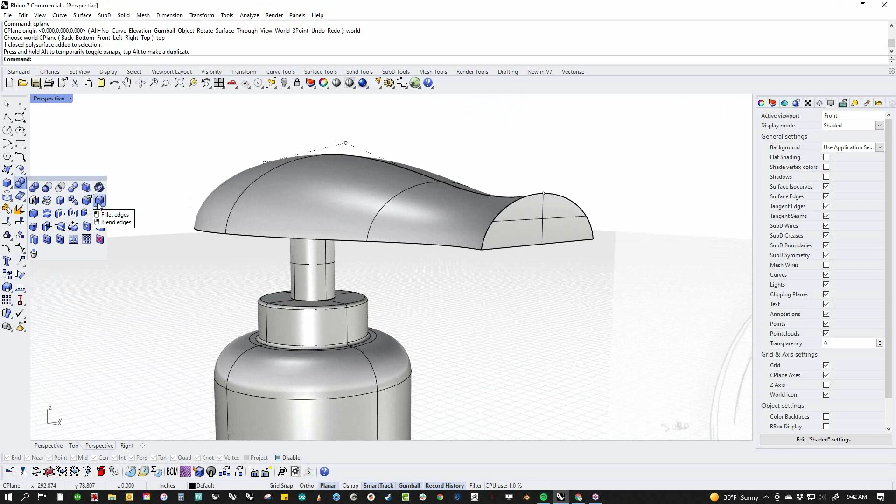All right, so that gives me the spout, and I don't like the aspect on it, so I'm going to just make it a little wider like that. And then it's a little sharp, so I'm going to round off this edge and then probably the bottom too. I just want to knock that off just a little bit. So let's go here, and instead of putting fillets, I'm going to right click and use blends because I just like how they look better.

And I should have addressed the seam. Actually, let's go back and fix that. I'm going to back up a little bit. I'm going to go back to here. This is the seam of the object, right? And I don't necessarily want that. So I think what I'm actually going to do is there's a command called surf seam that allows you to move the seam, but it's also just as simple to just rotate this thing 180 degrees so that the seam is at the bottom. Now, when I wire cut, the seam is going to be gone.

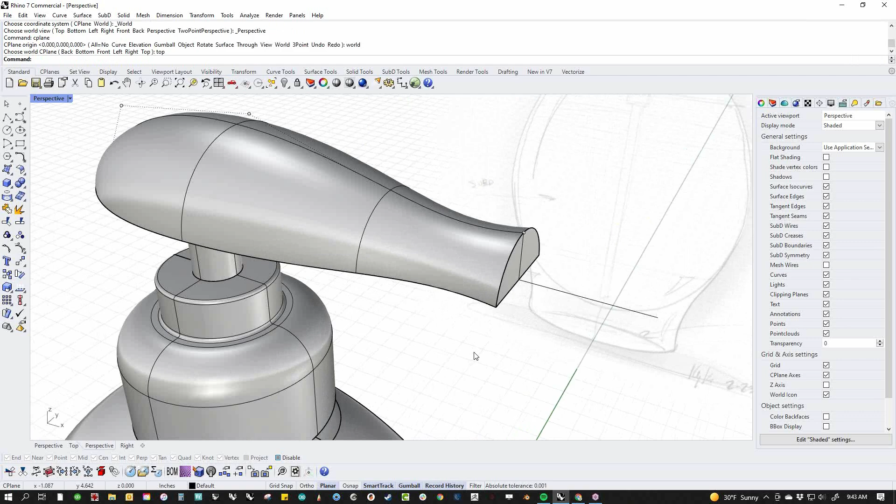Helps if I spell it right. Now the seam is going to be gone, and when I do my fillets, let's fix the aspect on that. Like that.

Now, when we come down here and we do our blends, see how the seam is continuous now, and the seam is continuous over there, and the seam is continuous there. That's why we pay attention to where the seam is.

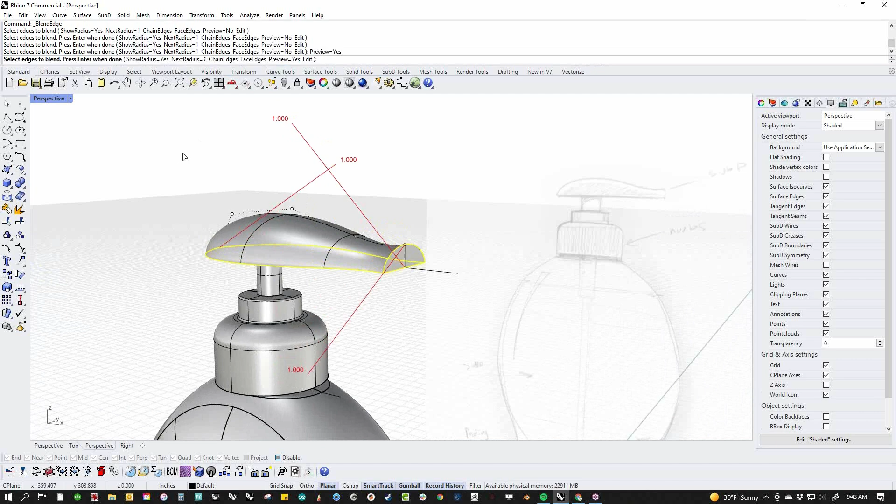All right, I'm going to preview this, and it's going to fail miserably because it's huge. And then we're going to say set all 0.01, and that pretty much does what I wanted it to do. It just knocks off the corners a little bit, makes it nice.

All right, and then we want to have a little spout in here, so I'm going to do a trick. Shift Control click, let go, grab a drag handle and start dragging, tap the Alt key. See how that little plus shows up? See that next to my cursor? Let go, and that breaks off a surface.

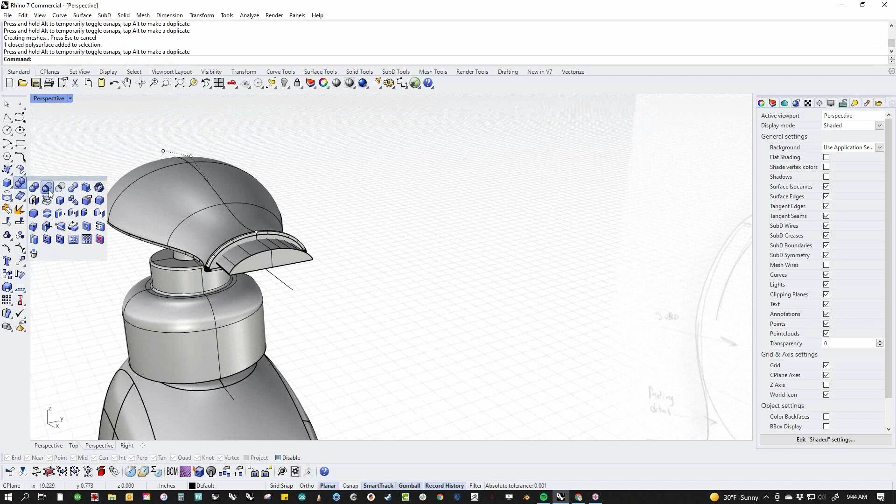Shift drag on a scale handle, drag on an extrude handle, make sure it's not punching through anywhere, make a little adjustment like that, and then we're gonna do a Boolean subtract to get the opening for where the soap comes out. All right, just to make it look a little bit more realistic.

All right, and then take this, plop it down on there so it intersects correctly, Boolean these two together if you want. You don't have to. And then the last thing that we would need to deal with is some sort of possible knurling on this, the little grippy scribbles here that I showed.

So let's hide everything, and let's Shift Control click on this edge, and I'm going to use a command in here called Dupe Edge. And this one allows you to pull a curve off of an object and use that for stuff that you want to do later. So in this case, I'm going to build the knurls.

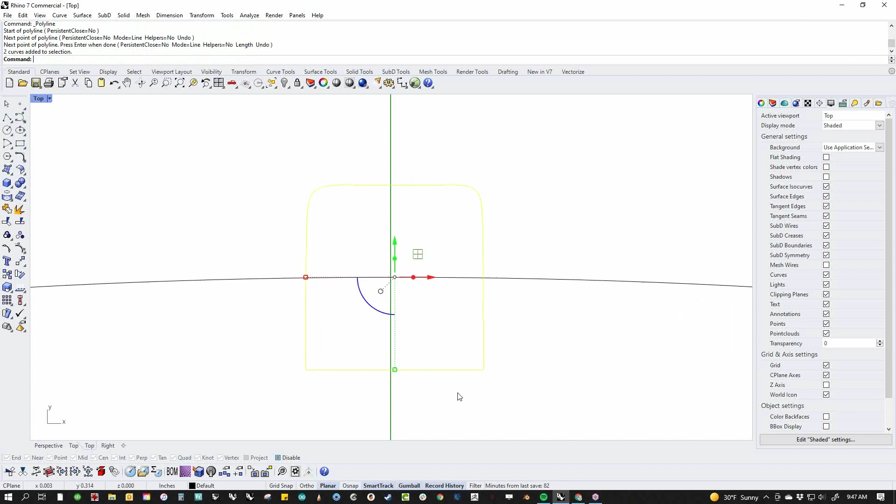And then what I'm going to do is back out, and you can see how tiny that thing is. And we're going to do transform array polar. And this thing is actually so small that we might even have problems with this. And let's do, I don't know, let's do 80 of these, and you can see that that creates the little knurls that we want.

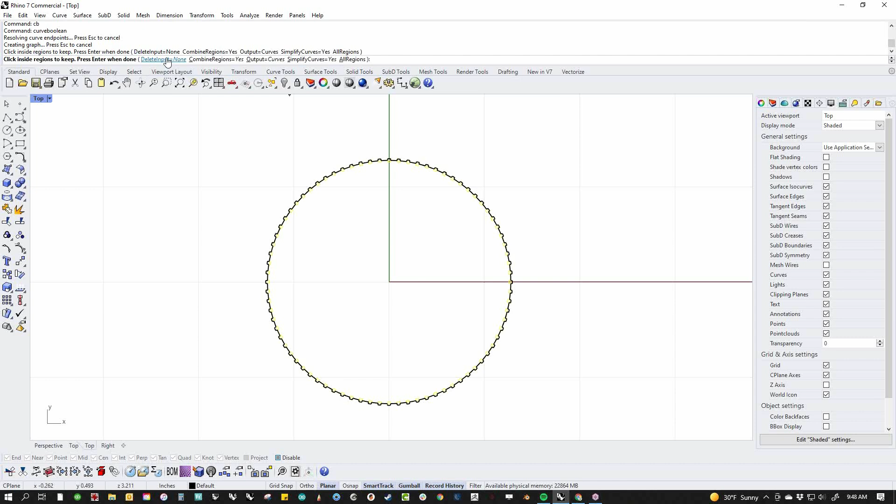Now, combining all of this stuff would make you absolutely insane if you had to trim each individual piece. So we're going to use a command called curve boolean. And I'm going to click outside of this to keep all of the exterior shapes. So think about it as a ray that's going to hit the outside of this, and wherever it hits something outside, it's going to draw a new line. I'm going to delete all of the internal input and then let it go.

And what this does is in one click, it takes all of that stuff and combines it. So imagine if you were trying to put this together with trim, that would make you kind of insane, right? So now that we have that, we can just drag the extrude handle, we get our knurling, cap it, and then we take our object, and then we figure out how the two of those relate.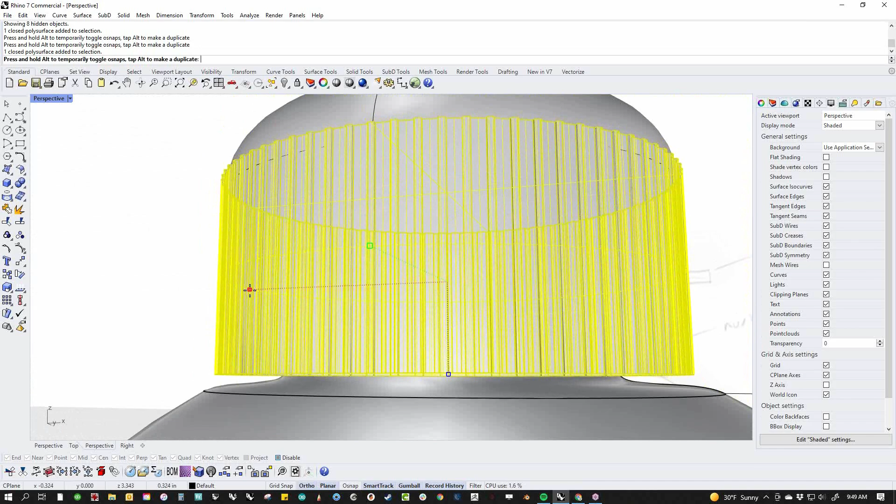And then we can either combine them, or if there's a material change, we can leave them not combined. We can scale it up, scale it down, do whatever we want. In this case, I think I'm probably going to scale it up just a hair. And then I'm actually going to combine them because they're similar materials. And that gives us our finished piece. Okay, so 49 minutes with a lot of blabbing. That's kind of where we are.

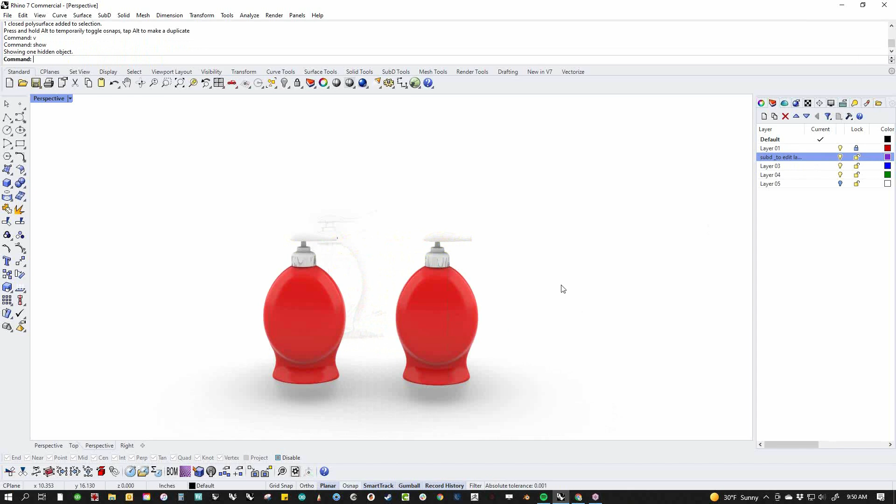Now, the cool thing about this is because this is SubD, well, this isn't SubD anymore, but because we kept our SubD piece, we can very easily take this and modify it and get 2 or 3 or 4 variations. Just drag, tap Alt, and you get a copy, right? So change this to a new layer, hide the original, so we've got it kept.

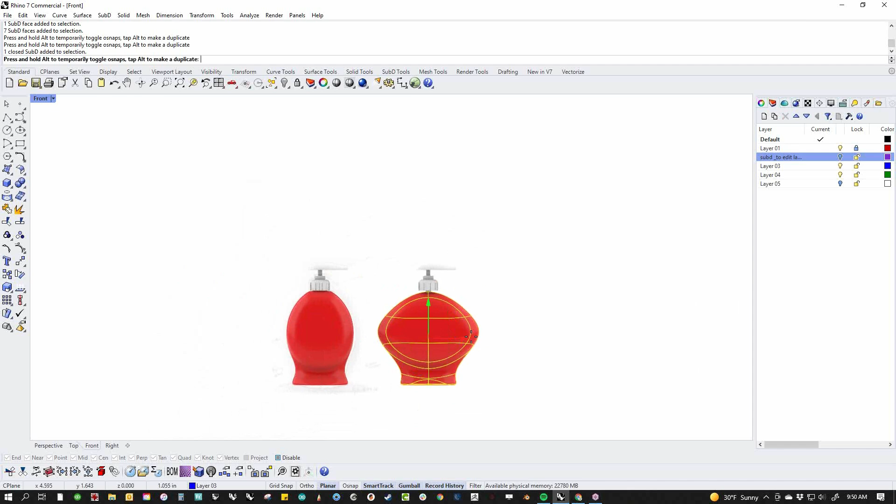And now all we have to do is edit this any way that we want, and we've got a new variation, right? We've got this shape, we've got this shape, we've got, you know, maybe we do a really tall one that's more for a kitchen.

This is all billable. If you're a consultant and you do design for a living, these 3 cut and pastes, those are entirely new products that you can bill for. So this is not only a really awesome design tool, this is a cash printing ATM where every time you make an edit to this, it's a new iteration. Your clients are going to be giddy because your workflow productivity is going to be through the roof. You're going to be giddy because you're getting paid what you're worth, because you're able to do all of this work and bill for it.

And you know, everybody's happy. So this is something that, I worked as a consultant for 20 years before I started working for McNeel. I ran a design business. I built thousands of models. I worked with hundreds of clients. And this is the kind of stuff that normal software demos don't talk about. They don't talk about how this affects your business.

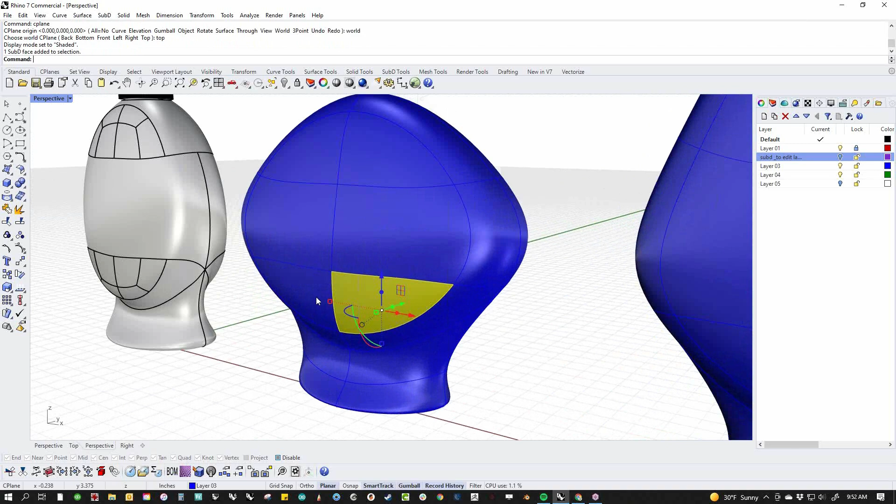This particular tool, this SubD workflow, once you've got these hard parts built, these are purchased parts. This is something that you're going to buy from a factory. The bottles, when you design these things, if you want to edit this thing and make a completely different shape, it's as simple as grabbing a few faces, and now this has got a completely different look to it, right? That's a billable change. That's something that you can make money off of.

All right, we can argue about whether it's good design or bad design all day long. The fact remains that now you can design at the speed of your imagination. And the best part about it is you can get paid for it, right? You don't have to suffer for hours and hours trying to rebuild a NURBS model for something like this that will result in you making $6 an hour.

Okay, so with that, if there's any questions, I'd be more than happy to take them now. If there's anything that you saw that you want to look into a little bit more, we can talk about that. But if not, I think that's probably what I have for you today.

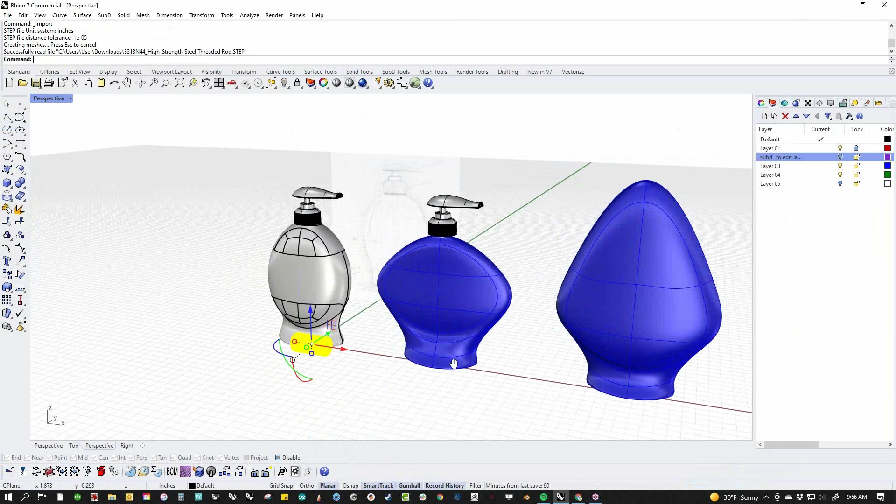Check this out. There's downloads for this thing. So I can download a 3D STEP, download that, file import. Obviously this isn't the right thread for this thing, but you can find the right thread here. I can bring this in, I can scale this to the right size, I can Boolean this in, and now I've got threads. So I don't model threads anymore. I just go get them.

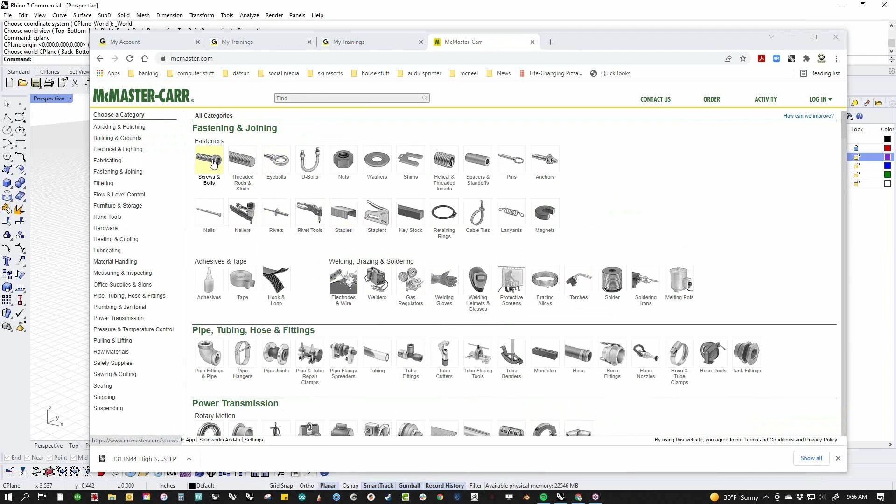I love the fact that they give CAD files for all of the stuff. If you're printing stuff, this is a really awesome site because you can pick the specific stuff you want. Say you want this bolt, I can put the bolt in here and Boolean it out, and it will put the threads in my model. Then I can print it, buy the parts from McMaster, they show up on my doorstep the day I get my stuff off the printer, and you clean them up with a tap, and they screw right in.

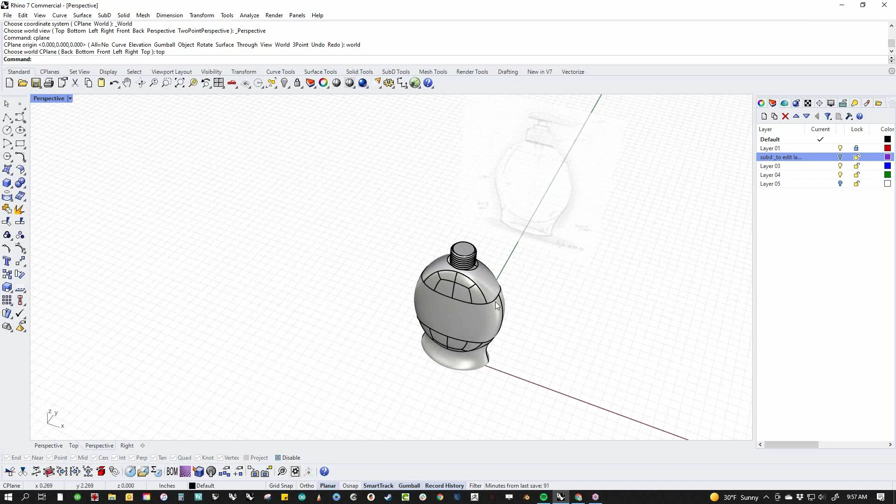How do you make it empty? There is a Shell command. In this particular case, if the goal was to have this be empty, I would have shelled it before I put the threads on. So let's take a look at that. We can run the Shell command, and I want my thickness to be, I have no idea how big this thing is. Let's figure out how big it is first.

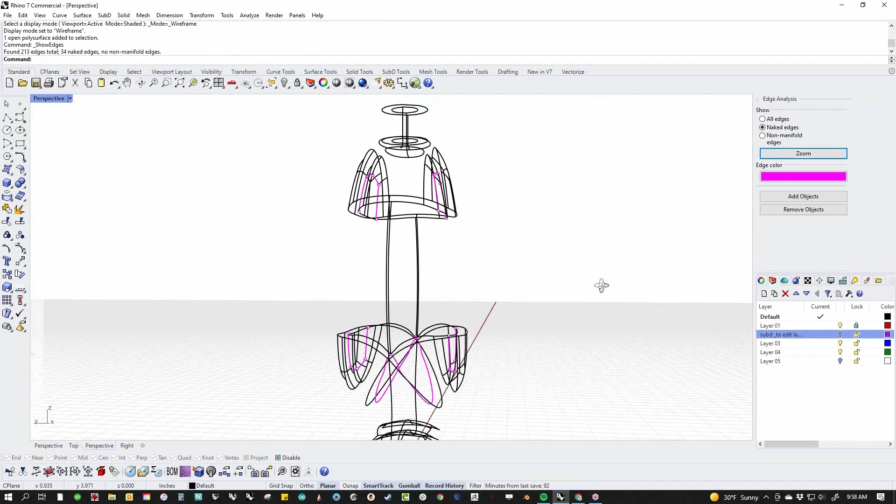All right, so that's a very small bottle. Let's shell it at 0.01. Pick the top to get rid of. It says the shell is not solid, so we need to inspect where it failed. The nice thing about shell in Rhino is it will do everything it can to give you a result, even if it's not perfect. And in this case, we would need to go back and repair these particular surfaces.

We can try it at a different value, maybe. We did 0.01. Let's do 0.005. See if that looks better. And that one actually worked just fine. So that would make it empty. So there is a shell command there. You are going to want to inspect the result and take a peek at that.

The other thing that you can do is before you convert it to NURBS, you can offset the SubD, which is usually what I do, so that I've got an inside bottle and an outside bottle, and then I just model them together. That avoids having to shell it later.

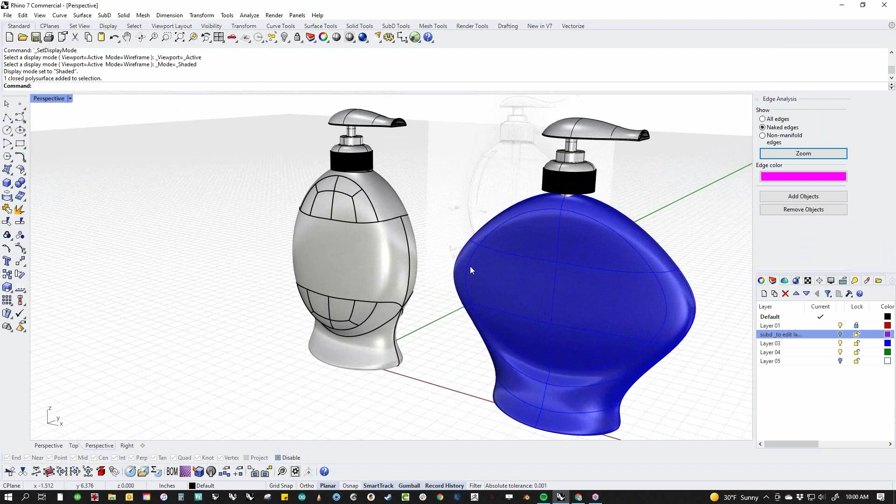Can you repeat last move? This up here where I moved the command line. Go over here where you see how my cursor changes to crossing arrows. Click and hold, drag it off while you're still holding. I can drag it around, I can put it wherever I want. Actually, I can move it to the bottom, I can move it to the top. Keep moving around until the purple lines up, and wherever the purple is, then let go, and that's where it'll drop.

Same thing with all the other palette items. I can pull this off, drag it around if I want to put it top, bottom, right, left, wherever the purple is, let go, and that's where it'll go. And then you can adjust it by dragging. So the double arrow allows you to adjust the aspect of it. The quad arrow allows you to pull it off.

You can do the same thing with all the tabs. If I drag a tab and pull it off, I can pull it off and float that. So if I've got a second monitor, I can stick this over on a second monitor.